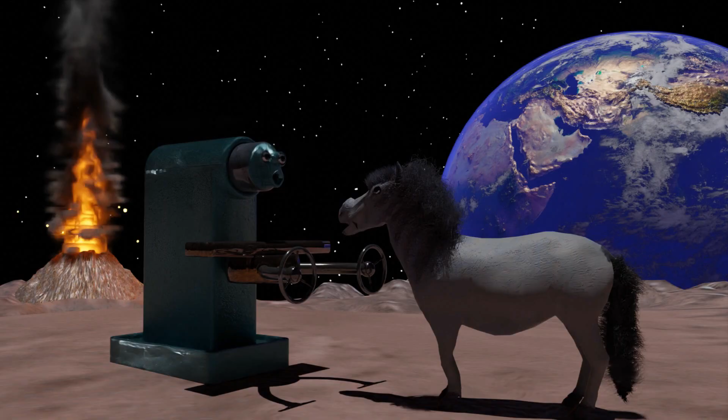Hopefully nothing too intense today. My hooves are aching already just thinking about work.

Oh, it's a fine task today, Bonnie. We'll be crafting a masterpiece, an eccentric cam and shaft from a solid piece of 4140 steel. A true work of engineering art.

Sounds unnecessarily complicated. Why not just skip all the eccentric nonsense? Who even notices those details? Details, Bonnie, are the soul of precision. This eccentric cam is designed to drive motion in a mechanism. Without it, the entire system fails.

Yeah, the soul of precision. You machines and your lofty ideas. Couldn't we just use a regular round shaft or something? Who's going to care if it's not eccentric?

The engineers will care, Bonnie. Imagine a horse cart without wheels. That's what you are suggesting.

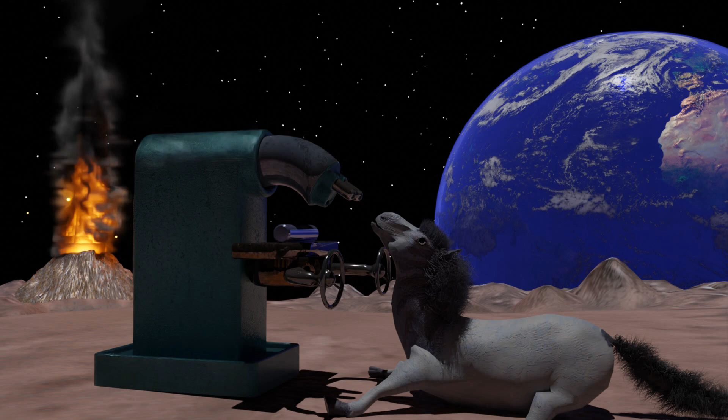Hello. Well, in this episode of Finno-Ugric machining, it's about making an eccentric for the retracting tool holder for a lathe.

There have been questions about how I make it, because it's actually a quite strange part to make. You cannot make it in my lathe, since it doesn't have the copying attachment you need for that. So you need to be a little bit creative about how to do this.

I will do it in this episode. But first, let's inspect the working drawings. I have them here. First of all, there's this drawing about the entire thing. There will be some threading to do, M6, and then a shaft, 10 millimeters. Oh wow, yeah, and then some other stuff.

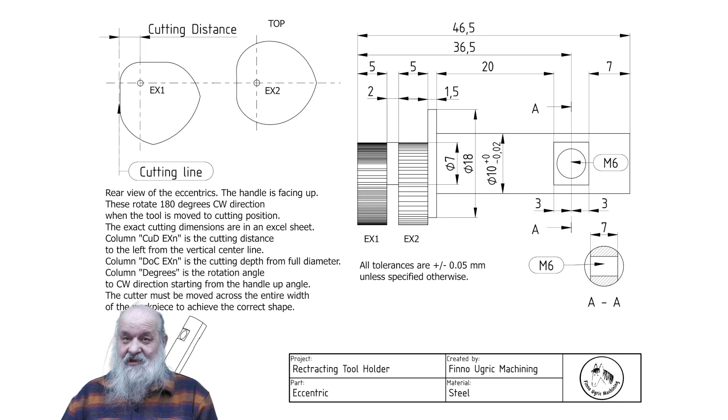But what's essential here is that there are two eccentrics, and their dimensions aren't entirely on this paper. For that reason we have another document, an Excel sheet, which contains a lot of figures - actually 72 cuts for each eccentric, showing the distance from the rotating center of these eccentrics. I use this when I make the eccentrics on the milling machine.

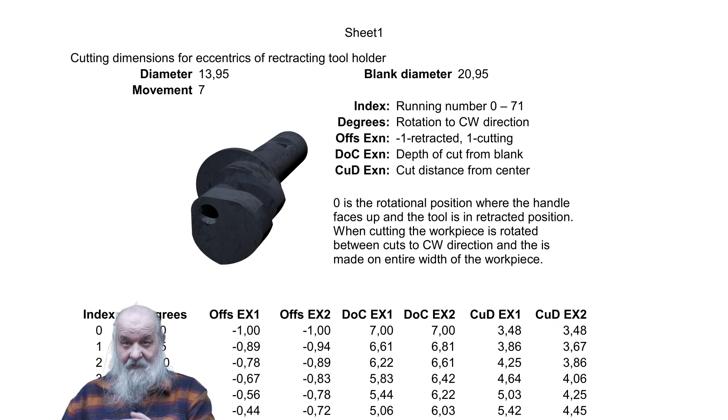I'll come back to these drawings when I'm actually doing this. So first we will turn the blank in my lathe, and once that's ready I'll set up the milling machine. There will be a dividing head and all sorts of stuff to help with this.

Actually this can be done in a conventional milling machine without any DROs, etc. Of course you need to help yourself by setting up a dial indicator somewhere so you can see the exact distances, but that's something you should already be familiar with. So let's start with the lathe and go on from there.

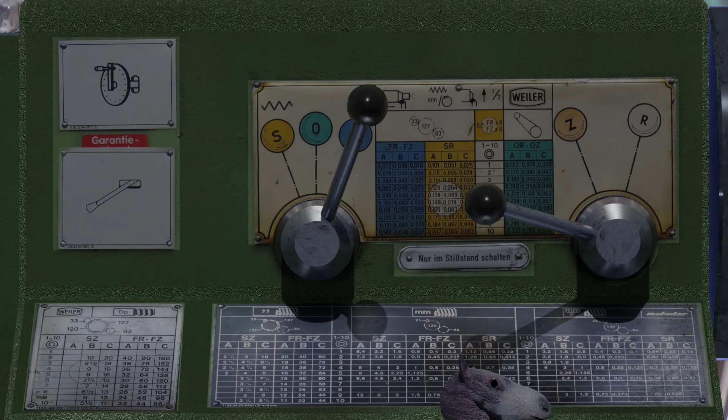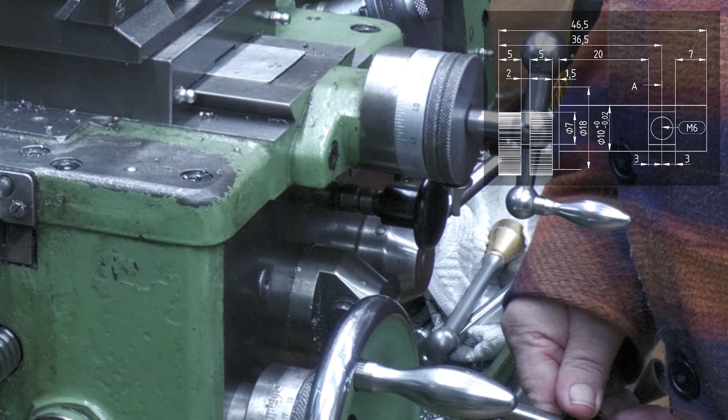Now this is 25 millimeters in diameter. Well, this is mild steel - I first thought I would make this eccentric out of 4140, but the piece I had was so large it would be my nightmare to machine. So this is it. Now let's see about some of the feeds here.

That's the wrong direction now. That's also wrong direction, wrong speed. That's better.

Okay, then let's touch off. Oh yeah, I'm facing it first. And yes, I will be silent after this, but I will supply you with all sorts of information on the screen.

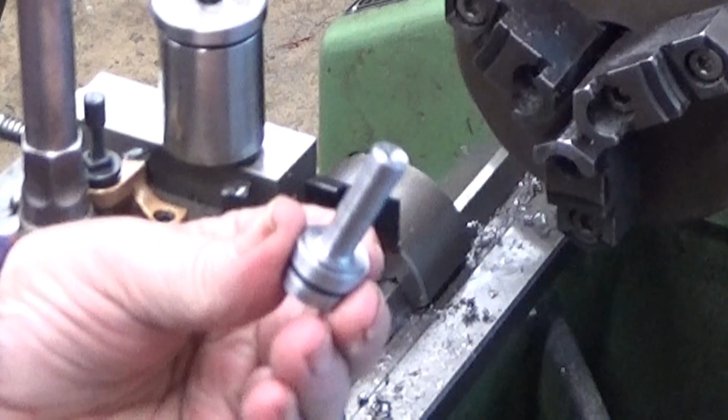Okay, now it's ready. Next step, milling machine. So, this is now the setup for milling this eccentric.

So 27 holes in the circle, and if this crank rotates 40 times, then it's the full circle. So it means that for every hole you get 40. It means that the total number of holes is 27 times 40, which is something like 1080. And when you divide that by 72, you get 15. So this is a 5 degree increment, and every 5 degrees means 15 holes.

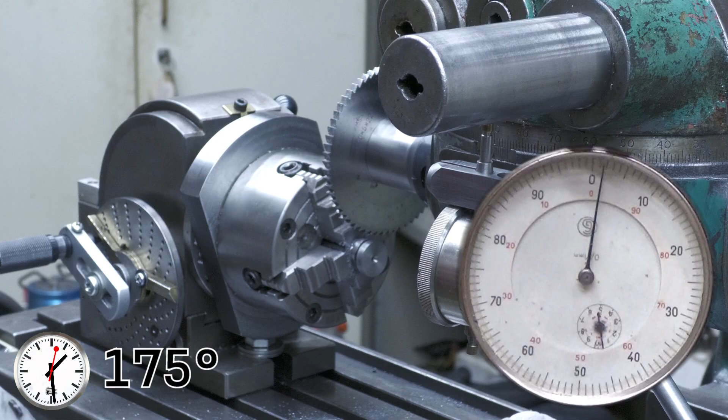So yeah, the first eccentric is ready, 72 cuts. At first I made a stupid mistake - I miscalculated the number of holes. It should actually be 10, not 15, so the first 3 cuts are a little bit strange, but it straightened out. Nothing too bad happened, I caught it in time because you have the degrees and everything marked, so I could check it - it advances 5 degrees every time.

Now the next step will be to make the other eccentric, and I'll do that off camera. I'm pretty sure you got the idea already.

Hopefully there will be no mishaps with this one, because there is a very thin web. It's not very steady because I couldn't use the tailstock here. So yeah, okay, but yeah - after this, the eccentric is ready this time. There's one feature that should be done, but I'll do that later. So yeah, let's see now.

Now something completely different. This is a part from the tailstock. Well, the design is a little bit stupid - you have a knob which is very large. It's otherwise low profile, but this large knob actually makes it about 10 millimeters higher at the end, and that makes it unusable in this case. But if I turn it down, then maybe yeah - so next step, turn that one down.

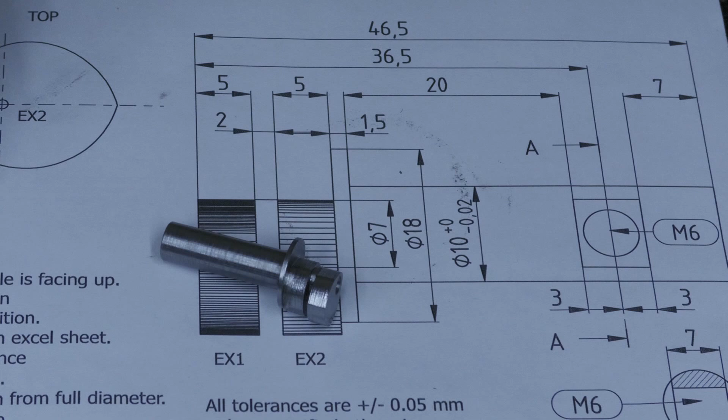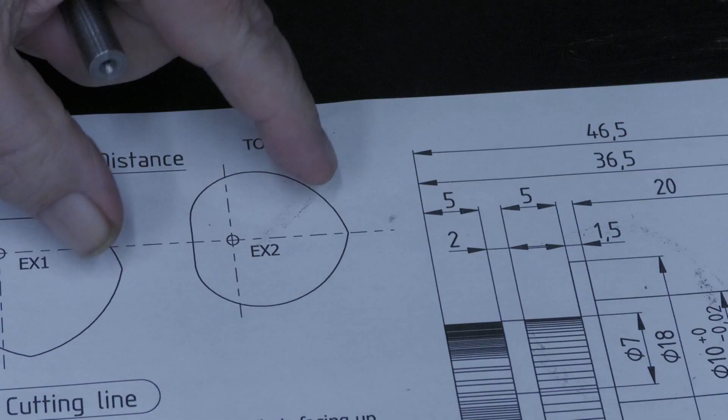Okay, that's now the part. Well, it's a lot smaller than you could imagine, but it succeeded quite well. I think it has a great resemblance with the picture, especially those eccentric pictures. And now, well, that feature is something I will do in the near future - it will be for the lever. There will be a lever in this one.

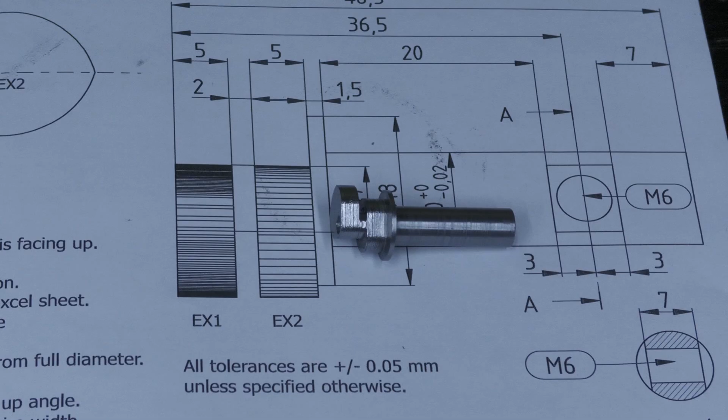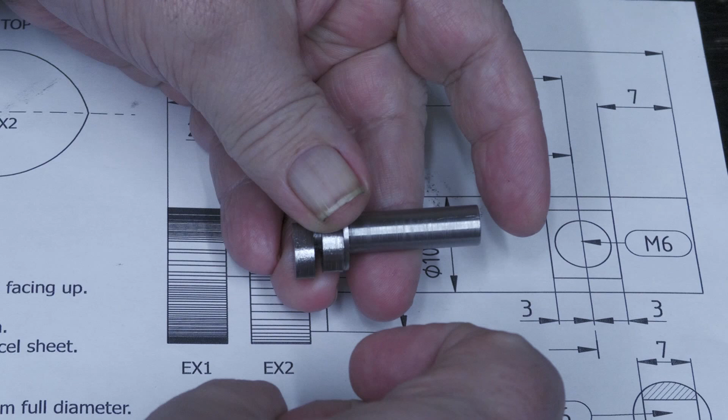And yeah, okay, so I learned something about this - if you intend to do this, it's a good idea to leave some extra stock at this end here, so that you can hold it in the lathe afterwards if you need to do something. I needed to face this afterwards. Of course, you can hold it on this shaft, but well, it leaves marks on that - not a very good thing, yeah.

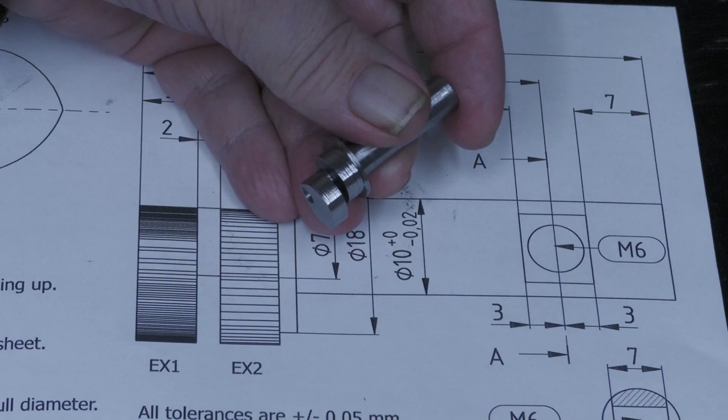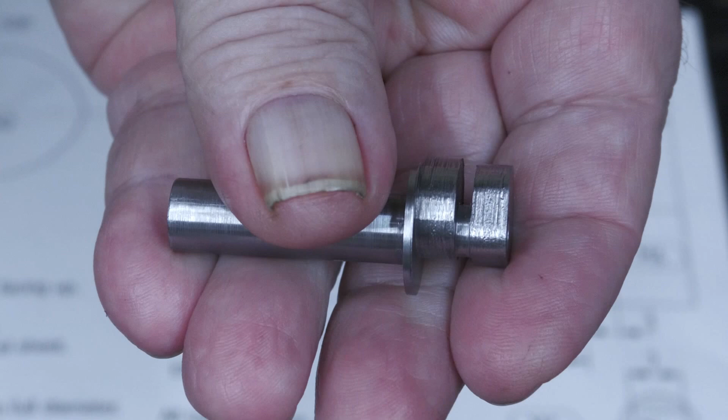But the method of making this eccentric by slitting saw was actually very good. Well, the surface finish is, how would I say it, it's somewhat, well, it looks like scratched, but it's because of the slitting, so it was a little bit old and so on.

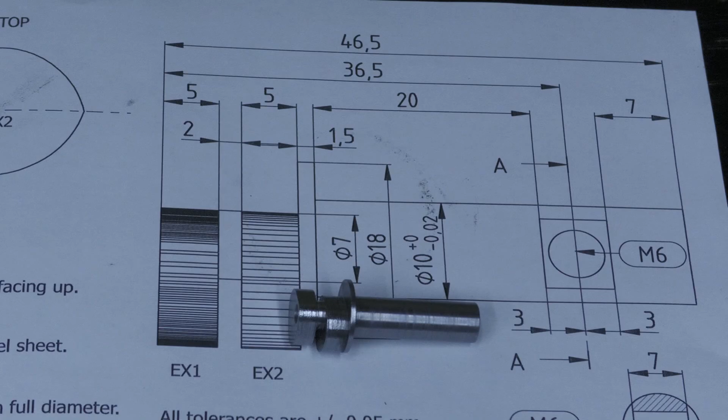So now that's the first part done. Well, next will be the holder, the one that goes into the lathe and holds the entire thing. And this one, of course, attaches there - there is a bronze bushing which holds this in that one. But I will do that in the next episode. Till then, bye!